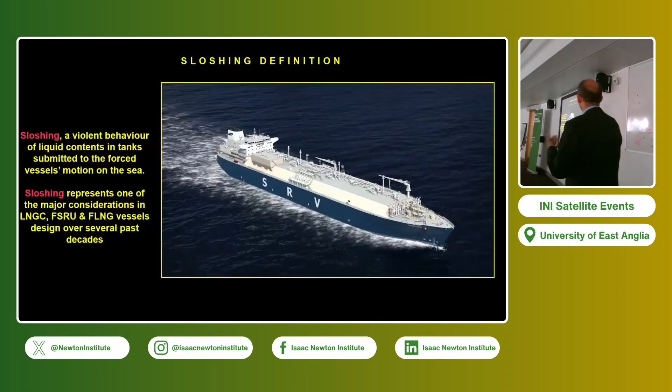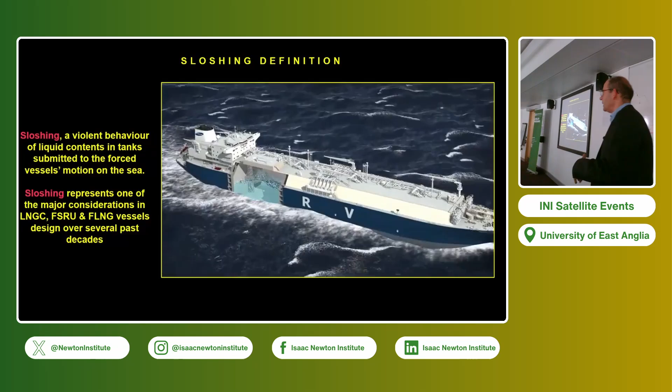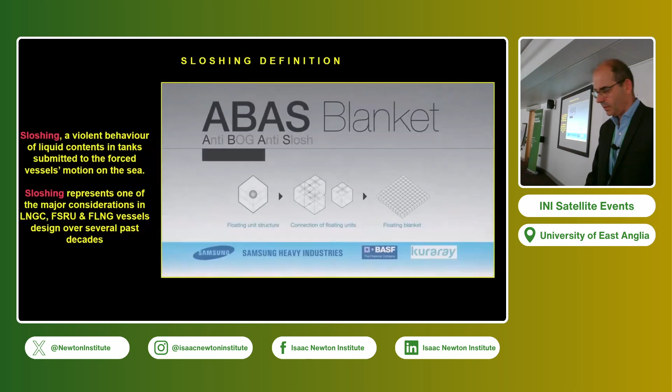the impact of the waves that could damage the containment system, and what you absolutely want to avoid is the leakage of the liquid content, because LNG is kept at a temperature of minus 160 degrees, and if there is a loss of tightness of the containment system, then the LNG, because of its very cold temperature, will make the steel of the ship brittle, and the ship will break and we will lose the ship and the crew. So this is the reason why we have to study it in classical engineering studies.

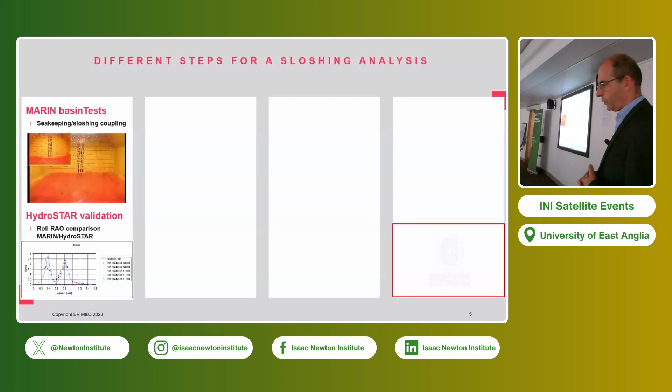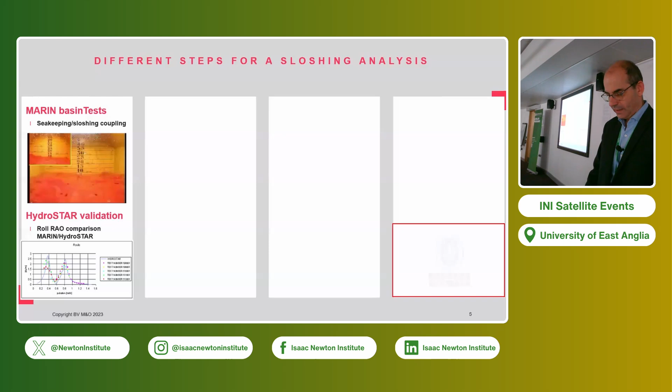First, we start with seakeeping analysis, where we compute the ship motions. For this kind of ship, we have to take into account the coupling between the internal liquid motion inside the tank and the ship motions. This can be done using classical seakeeping software, such as HydroSTAR that is developed in Bureau Veritas. It relies on the potential theory. And using this kind of approach, we can compute the coupled motion.

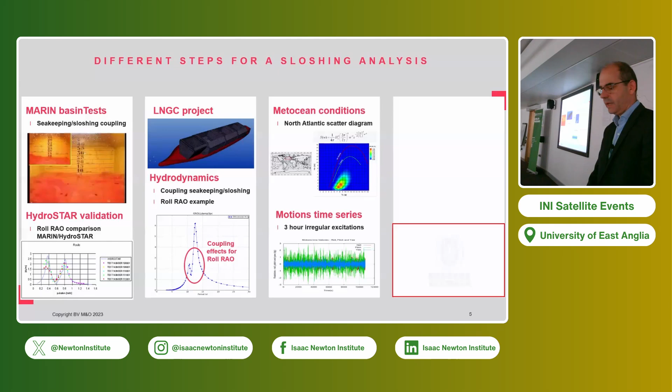So here, during the simulation, we have a screening of the tank's boundaries, and each time the pressure exceeds the given threshold, we store the impact in order to get, at the end of the simulation, an impact cartography. So in this presentation, I will deal mainly with sloshing experiments, but I will say a few words on how we can use these sloshing experiments in order to validate the CFD calculations.

What I can say also is that in daily practice in the industry, sloshing model tests and CFD calculation are complementary, because in sloshing model tests, you can put some pressure probes at some specific locations, but you cannot cover all the tanks with pressure probes, whereas with this kind of post-processing of the CFD calculation, by screening the tank's boundaries, you know all the events that occurred during the ship motions and during the simulation. So at the end, you are sure not to miss any sloshing events. So here is, I would say, the industry practice.

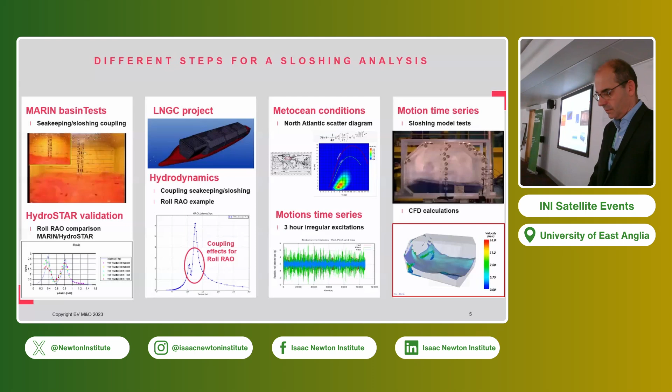And now we'll come to the different experiments that we have carried out in order to validate our CFD tool and in order to better understand the sloshing phenomenon. So first I will start with the global flow. As you see, in Bureau Veritas and in the bibliography that you can find on the subject, there are different kinds of tanks and configurations that were studied. So we start with a 2D harmonic test on a simple 2D tank.

Then there was, I'm sorry, I have to put the cursor here, okay. So there was also some experimental benchmark consisting in carrying out very simple experiments, but that can be shared, and these experiments are published.

So if anyone wants to validate CFD calculation or to perform sloshing model test, they can refer to this publication, where different research institutes, universities, and companies such as Bureau Veritas or GTT participated.

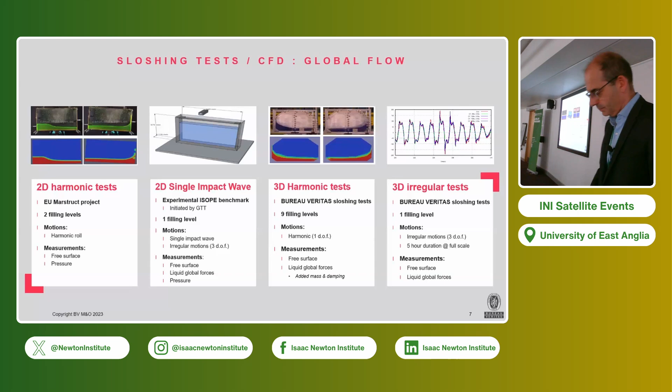Then in Bureau Veritas, in cooperation with École Centrale de Nantes, that is a French university, we carried out some tests with a 3D tank, and we performed a 3D harmonic test, and then we'll come to what we call 3D irregular test. By 3D irregular test, we mean the ship motions. We simulate the ship motions that the ship can see on the sea using Froude scaling. So I will detail a little bit.

So you can see for 3D harmonic test, you can see the setup. So here you have what we call Hexapod. It's a 6-leg platform which can reproduce any arbitrary motion. So for this campaign, we used the Hexapod of École Centrale de Nantes. Here the scale of the model is 1 to 70. We use water and air.

And for the test, we considered different filling levels. In fact, all the filling levels that the ships could encounter. So from low filling levels, what we call the 7.5% of the height, till high filling levels, different amplitudes, different periods of the motions, in order to test and to evaluate the nonlinearity of the phenomenon.

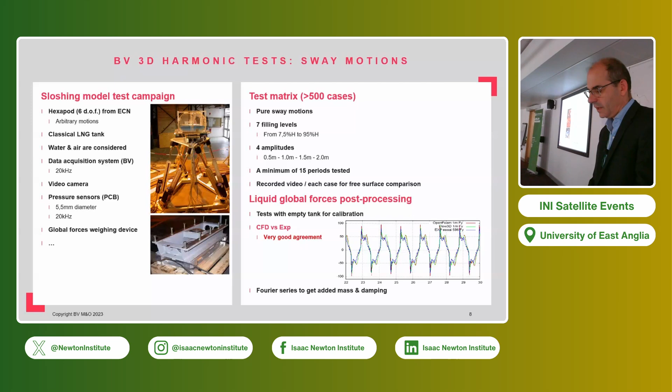And using this measuring device, which is called a global forces weighing device, it allows us to measure the global forces, meaning the integration of the pressure over the tank's boundaries. So it's a global force that we have measured, and here on the graph you can see a comparison between CFD calculation relying on OpenFOAM and the experiments, and you can see that the agreement for at least one motion was very good.

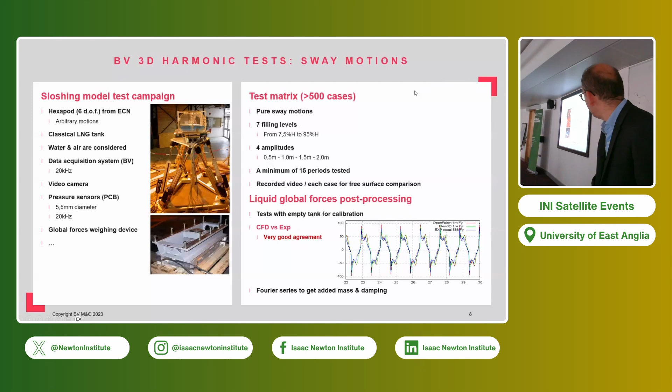So in a publication, we show all the cases that we have tested. So it was more than 500 cases. Each case represents 15 periods of motions. And we validated that the CFD is capable to predict accurately the sway motion, whatever the filling level, whatever the amplitude of the motion, whatever the period of the motion.

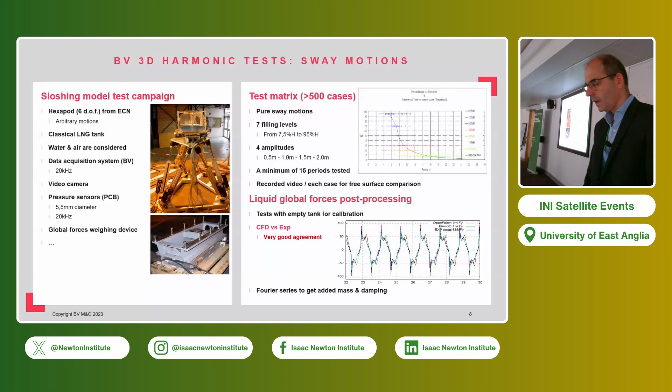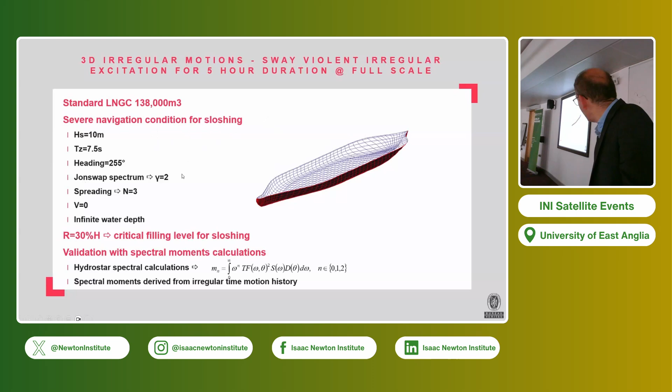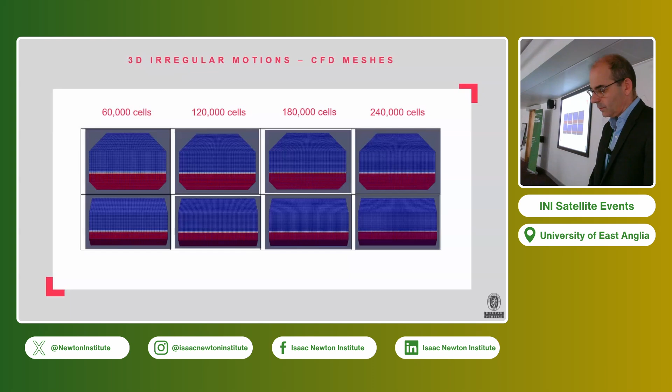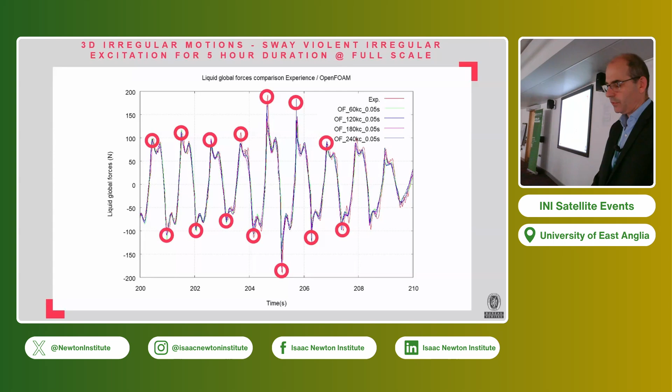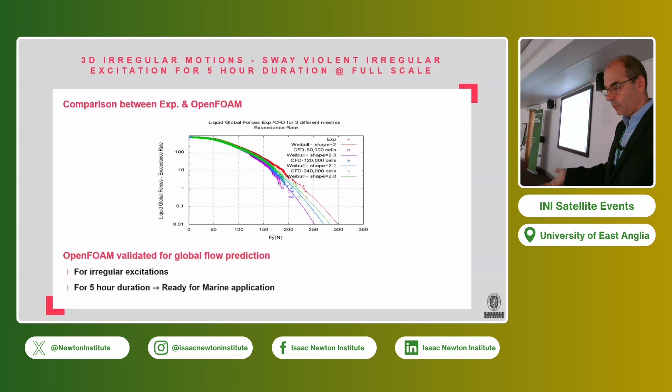And here, in order to represent the distribution of these global forces, we pick up the extrema and we can plot the exceedance probability function of these global forces extrema. And you can see that when you increase the number of cells, you tend towards the experimental distribution of the global forces maxima. So at this stage, we say that using OpenFOAM, we have a good accuracy for the global flow within the tank, and for us, CFD is validated for the global flow.

So now I will come to local flow. So for local flow, I will mention the ISOPE experiment that was initiated some years ago in 2012 by the French company that designed the containment system for LNG carriers, namely GTT. And so we start with a very simple geometry. So it is a geometry that you can find in the paper.

So it's approximately 1 meter in breadth. It's a slice of LNG tank. The scale would be 1 to 40 in comparison with a real LNG tank. We use water and air, and one filling level was tested. Different kinds of motion were tested. Simple impact wave.

By simple impact wave, we mean a very simple displacement that lasts 2 seconds. It's a back-and-forth motion in order to create an impact on the ceiling of the tank. And we put some pressure probes at the ceiling of the tank, and then we can compare the pressures between participants. It was the main objective of this experimental benchmark, but we also carried out harmonic tests and irregular tests.

So different parameters were tightly controlled during this experiment: the tank positioning, the filling level, and also the actual motion of the platform. So this was checked during this experiment. And as measurement devices, we used a high-speed camera with 1,000 frames per second and pressure sensors; there were from 16 to 72 pressure sensors, with a sampling rate of 20 kilohertz.

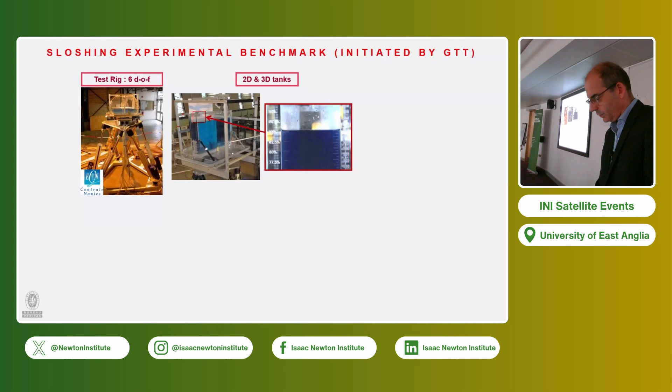So here it is the hexapod that was used during the experiment. You can have a look at the tank that was tested. For the pressure sensors, at BV we had only 16 pressure sensors, so we used our 16 pressure sensors with a sampling rate of 20 kilohertz. That is a minimum in order to capture the dynamics of the impact.

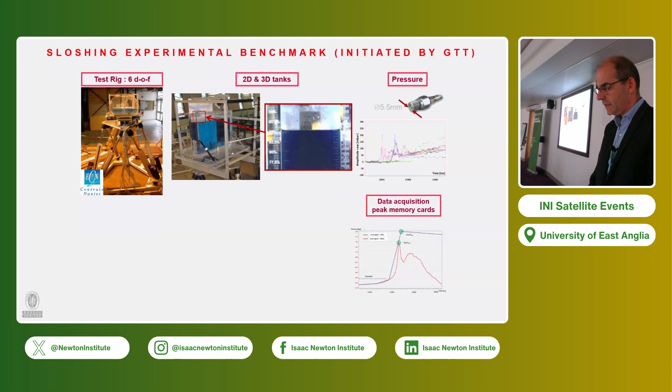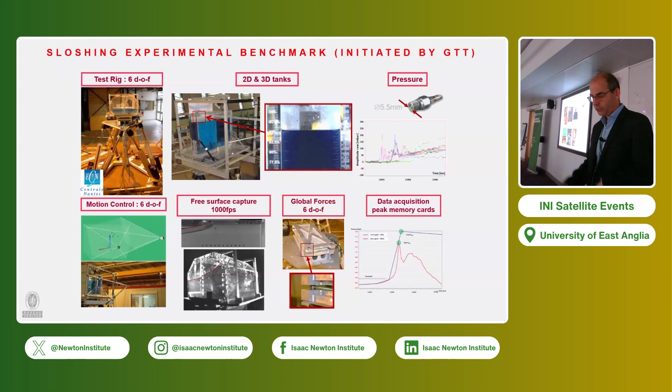We also used a global forces balance in order to measure the global forces. As I said, we have a video camera with 1,000 frames per second, and there was also the use of a motion control in order to check the motion of the tank during the experiments.

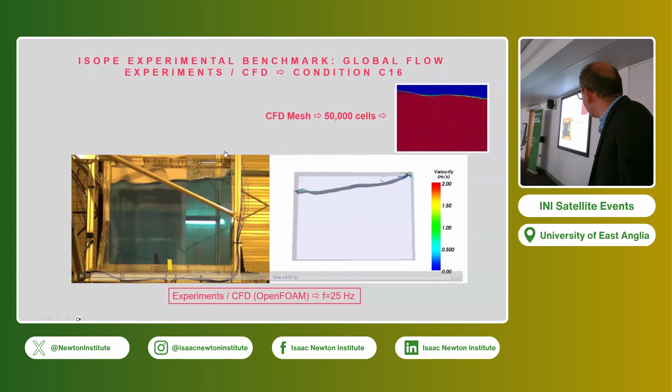So here you have an example of the test that is called a simple impact wave. You can see that the motion is very short. You have the case that was reproduced in CFD. Here it is a classical video camera, so only 25 frames per second.

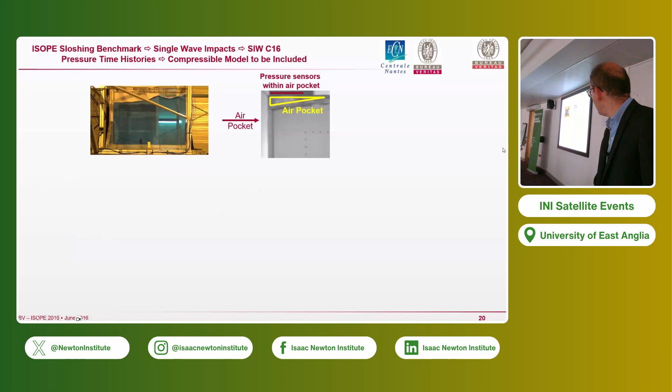And what was very nice in this case is that during the impact, we isolated an air pocket impact. And so the pressure sensors were located in the air pocket, meaning that all the pressure sensors were measuring the same pressure. So this experiment was very nice in order to validate and calibrate the pressure sensors, I would say.

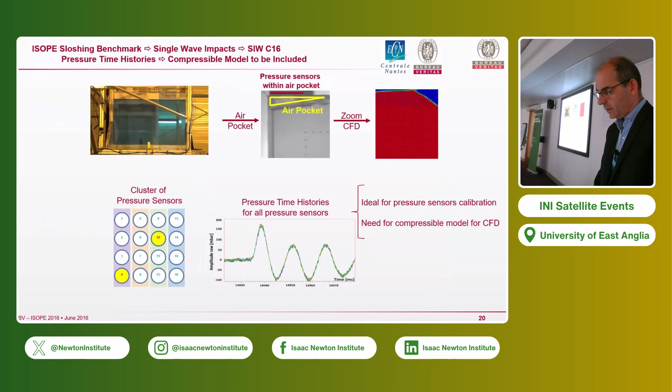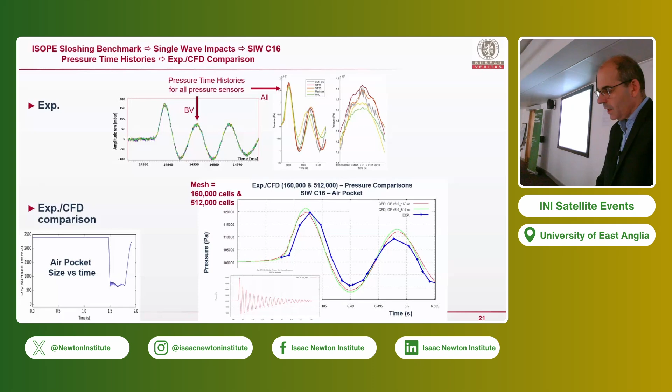So it's a very good model because the time duration of this motion is very short, and so we can compare CFD calculations very easily. We have to introduce a compressible model because the air pocket is compressed during the impact. And if you want to check your compressible model for your CFD calculation, this is a very nice case. So it's what we did, and the agreement was, I would say, reasonable.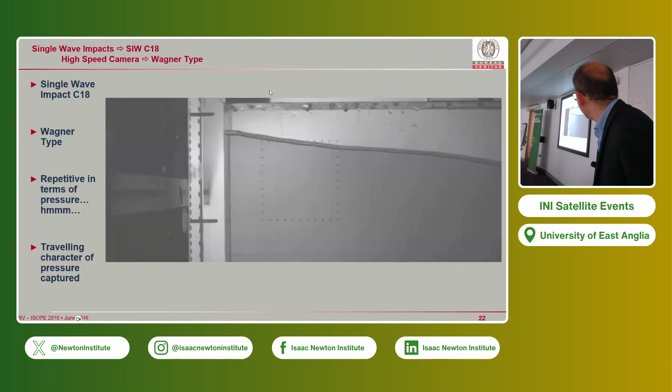So the case that I have just shown you was, I would say, a simple case for which we had a very good agreement. Now we come to a case where we have the high-speed video camera, and here you have a zoom on the impact. Here it is the ceiling of the tank, and you can see that we have an inclined free surface with a kind of Wagner impact, because you have an inclined free surface with respect to the ceiling.

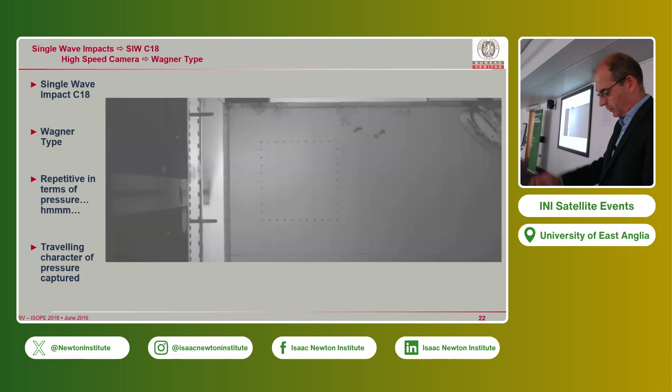So we thought that it would be quite easy to compare with maybe a Wagner model, and also that it was quite an easy test case to compare between the different participants. But if we now compare the pressure measurements, I will not detail the participants too much, but there were French universities, Nantes with Bureau Veritas, the University of Marseille, the French company GTT which designs the cargo containment system, the Norwegian SINTEF, and Korean, Spanish and Chinese universities participated in this experimental benchmark.

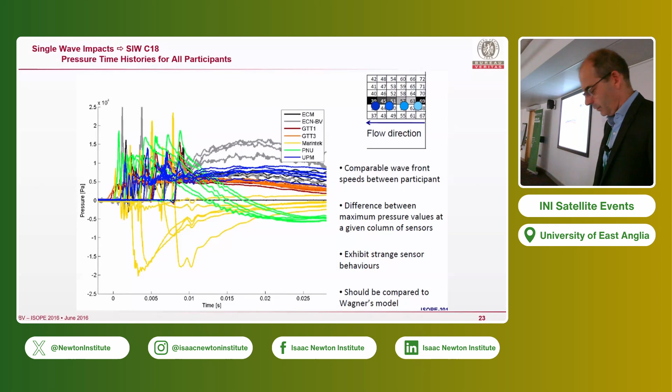And you can see that there are quite large discrepancies among the different participants for a very simple motion, and so for a very simple impact. Now if we zoom a little bit, here we have the ceiling corner. There were of course some repetitions of this test in order to see the repeatability of the test. That is very important. There were 10 repetitions of the test, and we can see that depending on the participants there were large discrepancies for exactly the same motion, a priori.

So these results were quite disappointing. It was during the first year. So during the second year, there was a repetition. And from this test, we can see that the best, at least the tests that are the most repetitive, come from the French company which designed the cargo containment system, namely GTT. This company is quite experienced in sloshing model tests because it is their daily practice. They have 4 hexapods running 24 hours per day.

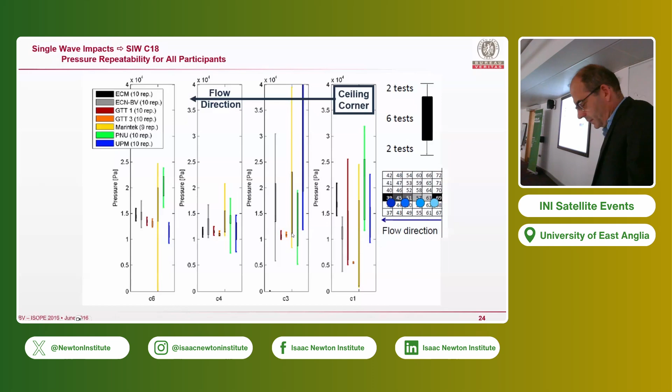So we could give some confidence, but in order to check and to compare, we decided to carry out a CFD calculation using OpenFOAM, and indeed, taking into account the size of the pressure sensor, when we compare the CFD calculation in red with the experiments in blue, we had quite good agreement, except close to the corner. Close to the corner, the agreement was not so good.

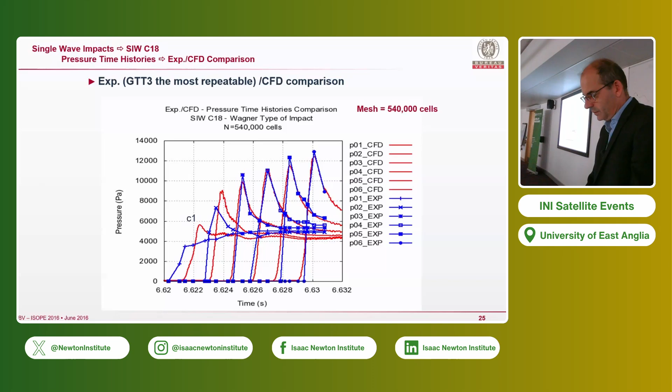It still needs to be explained, but afterwards, we had quite good agreement between our CFD calculation and the model tests carried out by GTT, which were the most repeatable. So it gives us some confidence in this model test and also the CFD calculations.

So at this stage, we can say that the conclusion of this experimental benchmark is that carrying out sloshing model tests is not an easy task. There are many constraints about the data acquisition system because we need to ensure that, for instance, the sampling rate of the pressure sensors is high enough to capture the dynamics of the impact.

Also, there was a strong focus on the signal processing of the pressure sensors. Many mistakes can be made when we post-process these results. Also, the filling level needs to be carefully looked at, and the tank alignment. So all this was checked, but we need to be very careful.

So this ISOPE sloshing benchmark enables comparison between different companies and research institutes, and this sloshing benchmark is a very good basis for CFD validation, because with this simple impact wave, as you saw, we have a very short duration of motion, and we can calibrate CFD using a compressible model or other kinds of impact.

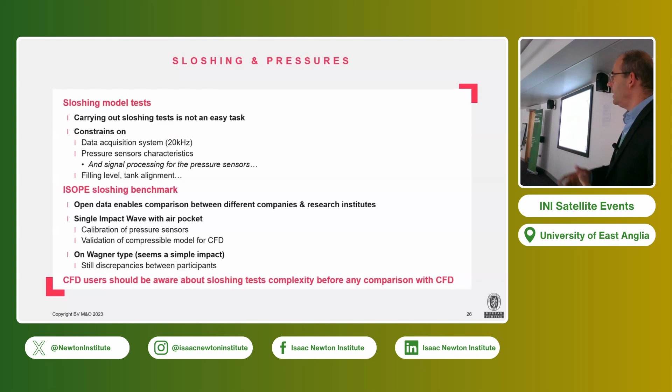And the final conclusion is that CFD users should be aware of the sloshing test complexity before any comparison with CFD. So, of course, there may be some discrepancies between the numerical calculation and the experiments, but the experiments should report the repeatability of the test, and this is not often reported in the literature.

So now we'll increase the complexity of the sloshing model test a little bit, and we'll speak about the phase transition during sloshing impact, and we'll talk about the SLING-IMBOL projects. So during sloshing impact, the main governing parameters, in terms of dimensionless numbers, are the Froude scaling, the density ratio, so the density of the gas divided by the density of the liquid, the gas Mach number, the Weber number, the Reynolds number, and the Jakob number.

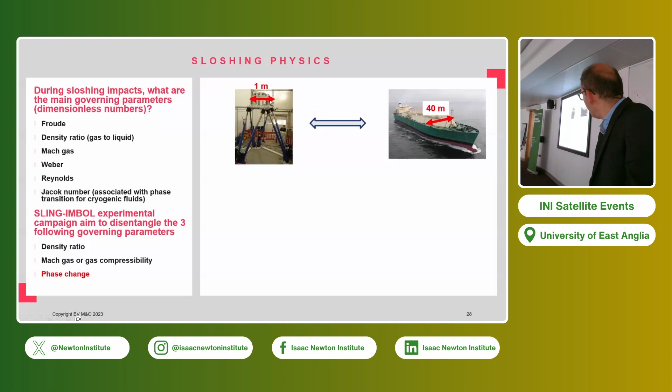During the SLING-IMBOL project that I will talk about, we put the focus on the density ratio between the gas and the liquid, the gas compressibility, and the phase change during the sloshing impact. So all these questions refer to the extrapolation of the model test to full scale. As I said, usually we carry out a sloshing model test for a tank that is 1 meter in breadth. So the scale here in comparison with full scale is 1 to 40. So once we have measured the pressures, how do we extrapolate from model to full scale?

So we need to take into account, and in the next slides we will talk about, the gas compressibility, the density ratio, and the phase transition. So in actual sloshing model tests, the gas compressibility is too high at model scale. The density ratio, so the density of the gas divided by the density of the liquid, in the model test and in reality is the same. And the phase transition is not present at model scale. So we'll see what could be the influence of this phase transition during sloshing impact.

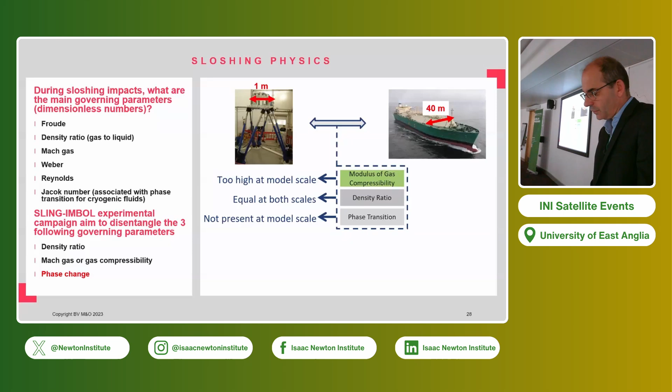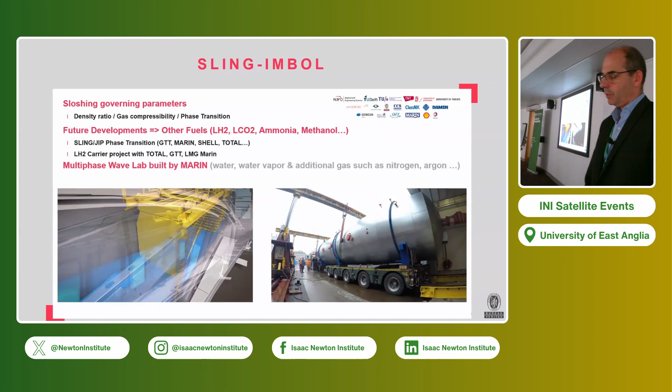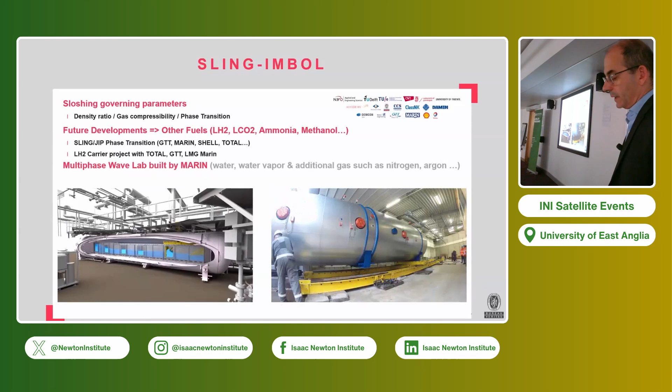So for this, some years ago, in 2015-16, there was a project initiated by MARIN, a Dutch maritime research institute, with companies such as GTT, a French company which designed the containment system for LNG carriers, but also Shell, Total, classification societies such as Bureau Veritas, the Chinese classification society, and so on. And so we wanted to study these governing parameters in more detail: the density ratio, the gas compressibility, and the phase transition.

With the aim also, because now we know that we have a good return of experience on LNG carriers, so on all ships transporting LNG, but now because of decarbonization, we have new fuels that come into the game, such as liquefied hydrogen, liquefied carbon dioxide, ammonia, or methanol.

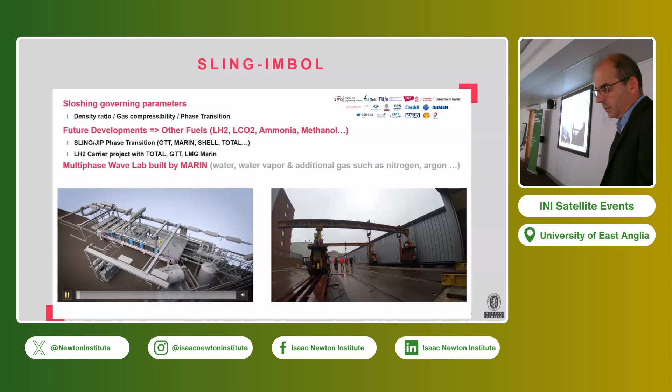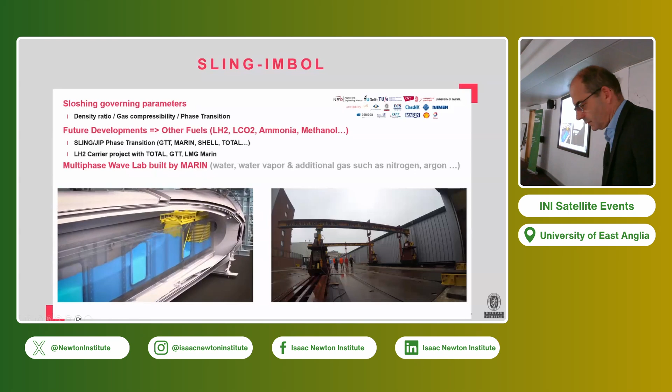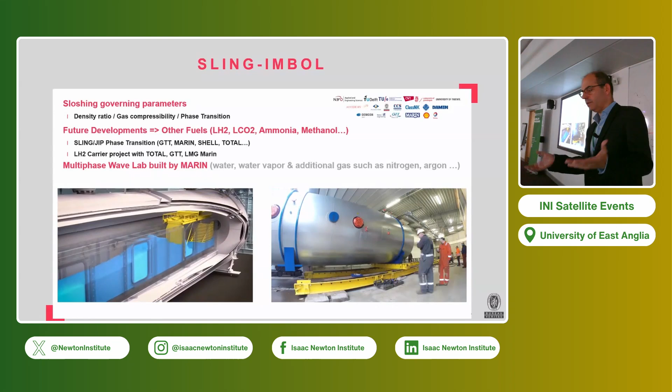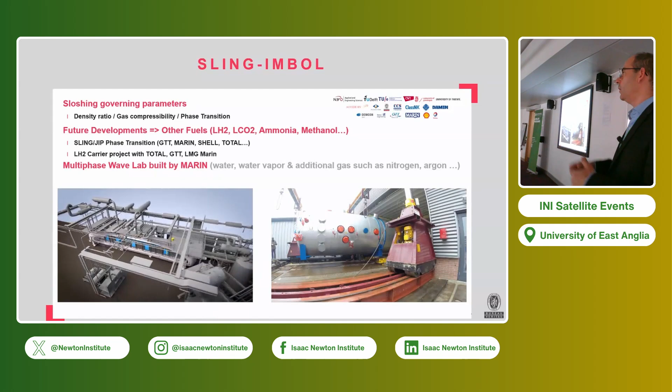And so all these companies are interested in these new fuels, so we want to better understand the physics. So we decided to design this kind of experimental device that is, sorry, I will put again the video. So that is quite impressive. So it consists of an autoclave which is approximately 20 meters long, in which we have put a flume tank. And this autoclave consists of a controlled environment where you can play on the pressure and the temperature in order to be on the phase transition curve for the water, and in order to have condensation or evaporation during sloshing impact, in order to study phase transition during sloshing impact.

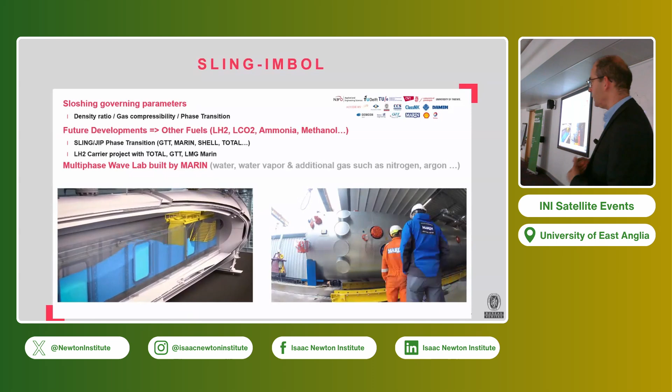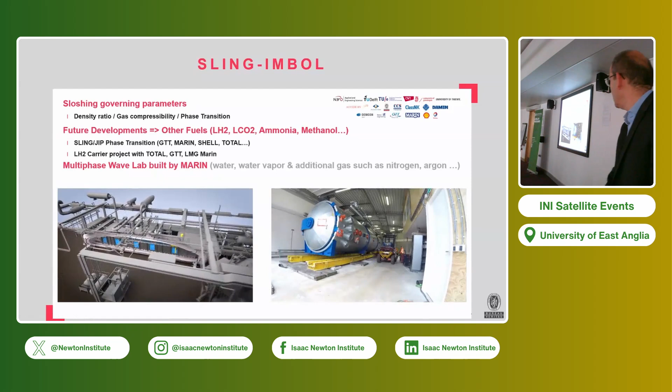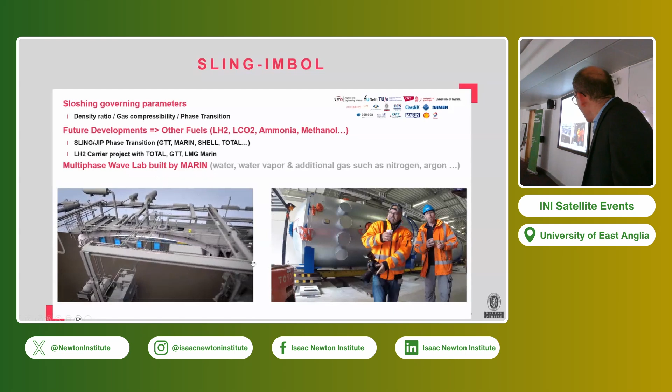So this project was a little bit delayed during COVID, but now we have the results, and some additional results are ongoing. So these projects are called Sling-Imbol. Devaraj van der Meer, professor from University of Twente, is responsible for the Imbol project, and it is a continuation of this Sling project. So you can see that is quite impressive. The diameter of this autoclave is 2.5 meters. Inside this autoclave, as I said, the temperature can vary from 15 to 200 degrees. The ullage pressure inside the autoclave can vary from very low pressure to high pressure, 10 bars, namely. And the gas composition can vary inside this autoclave.

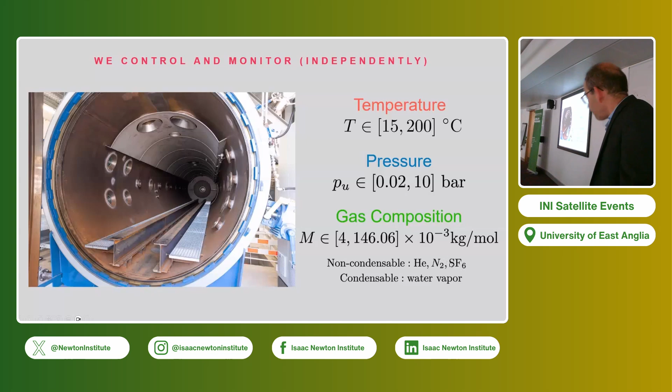One can put nitrogen, argon, SF6, and the liquid of interest is water. So inside this autoclave, we have a flume tank with a wave maker, which is a piston-type wave maker. And you have a beach in order to facilitate the wave breaking. And here you have at the end a wall equipped with pressure sensors, with a high-speed camera, in order to film and to record the impact.

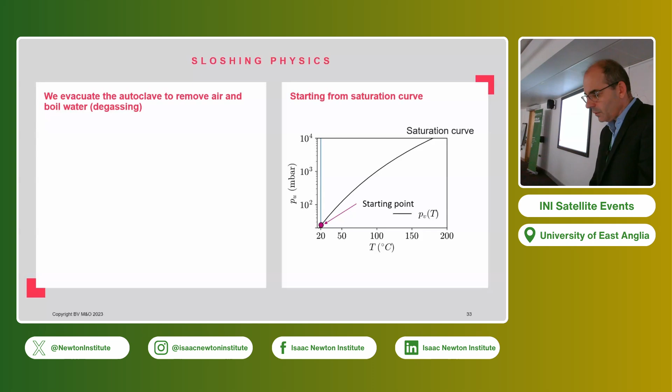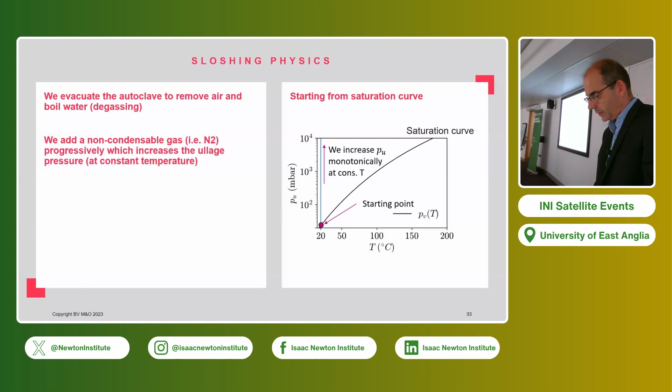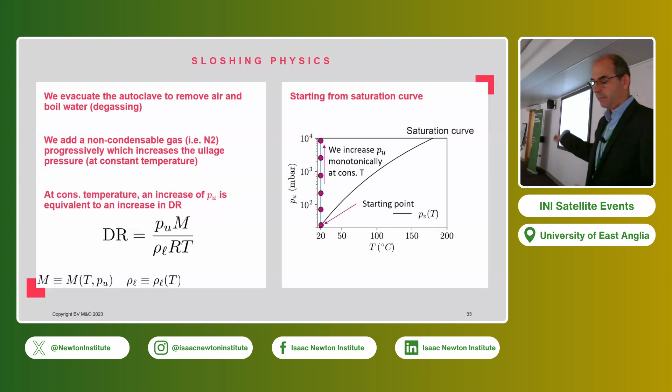So how do we, in practice, during this experiment, because we can play on the pressure and temperature, we can go along this saturation curve. That is quite important in order to study phase transition during the impact, because I have to remind you that LNG and liquefied hydrogen are cryogenic fluids that are in equilibrium with the vapor. And if we also want to study the density ratio, we can increase the ullage pressure, and for this we start from the phase transition curve, and slightly we can put a non-condensable gas on top of the water vapor, and namely for the experiment that I will show you, nitrogen was considered. And by doing so, we can increase the ullage pressure, and the ullage pressure is related with the density ratio between the gas and the liquid, and as you will see, density ratio is a governing parameter for sloshing.

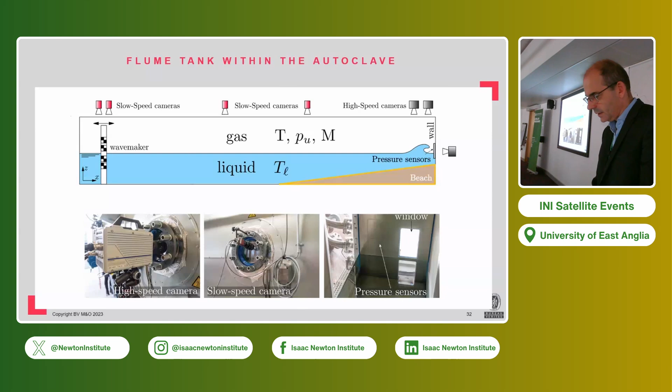So as a motion for the wave maker, we use the motion that comes from seakeeping analysis of a ship. Even if in a real tank you have the two boundaries that move together, and here of course only the wave maker moves, anyhow we try to simulate what could be the motion inside the LNG tank by considering actual motion using Froude scaling. So it's what we did. So we have a long wave maker motion, during 3 hours at full scale. So it was a wave maker signal that was considered.

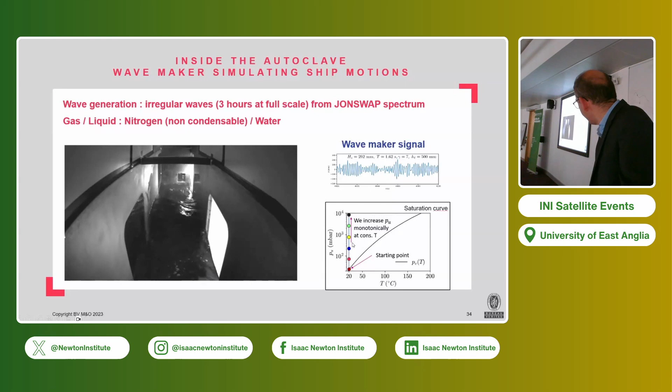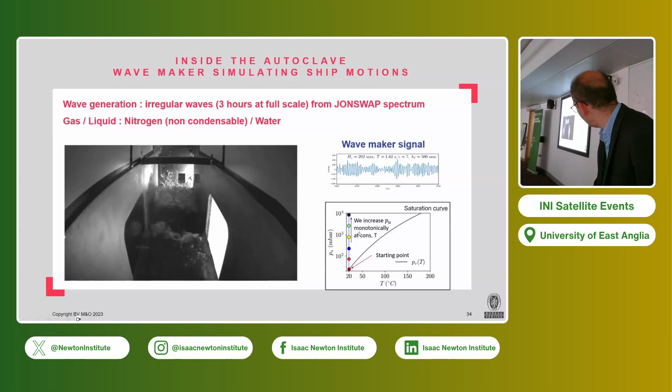And here we consider the ambient temperature; it's ongoing, we'll study all the cases in the rest of this space. But here, in this presentation, I show only results at the ambient temperature. So the parameter that is changing is the density ratio. We start from a very low density ratio and we increase the ullage pressure, and so we increase the density ratio. And we will see the result. So here we measure the pressure.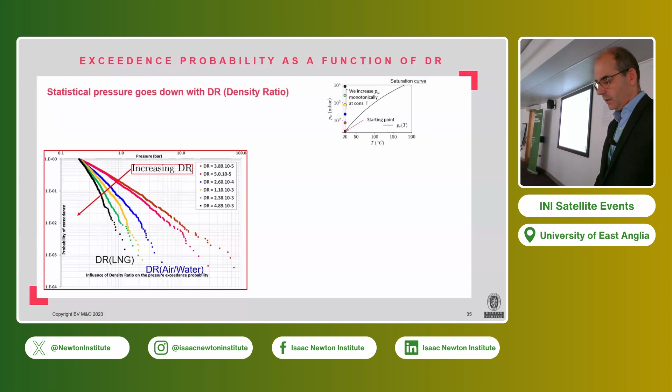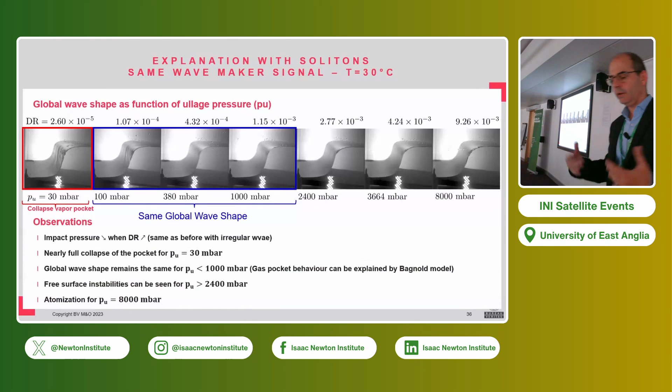So in order to explain this decrease of the pressure with the increase of the density ratio, we came back to very simple impacting wave shapes. This is the reason why we studied solitons here. We can generate solitons with the same wave maker signal, and we can study the global wave shape of these solitons according to the density ratio. Namely, for some density ratios, the global wave shape just before the impact is strictly identical, but we also noticed that the pressure decreased when we increased the density ratio.

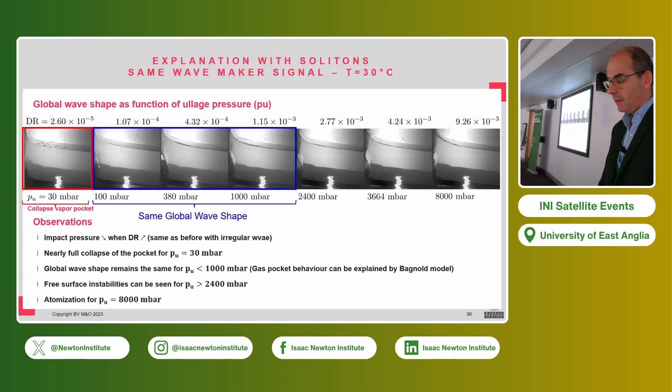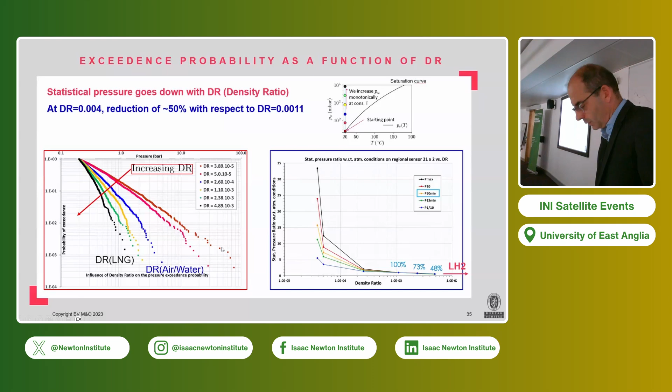But today I will put the focus on this experiment where we are very close to the saturation curve. We saw on the irregular test that this point close to the saturation curve gives very large impact pressures. And we also verified with these very simple soliton cases that the pressure associated with this soliton can be quite large.

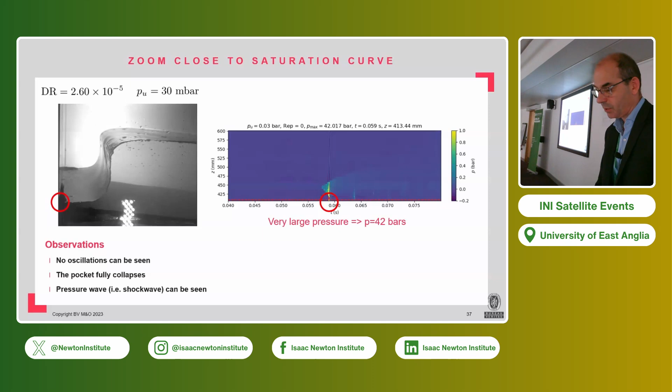What can also be observed is that, contrary to the other cases, we have a kind of gas pocket here, but during the impact, the pocket fully collapses, which is not the case with the other density ratios. We have a pressure rise, the shock wave can be seen, and we have a very large pressure at the bottom of the wall. So now I will come back to the other cases.

Yeah, it's finished. It's finished. Sorry.

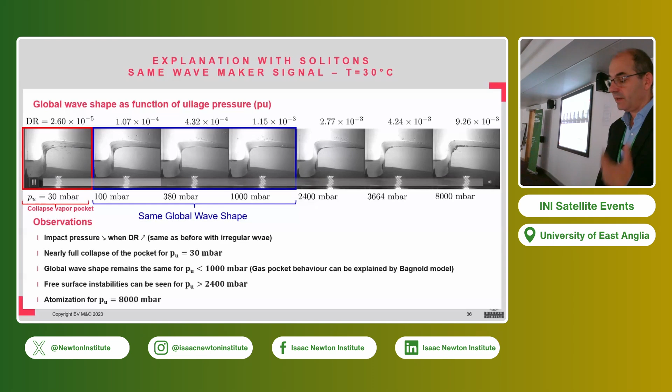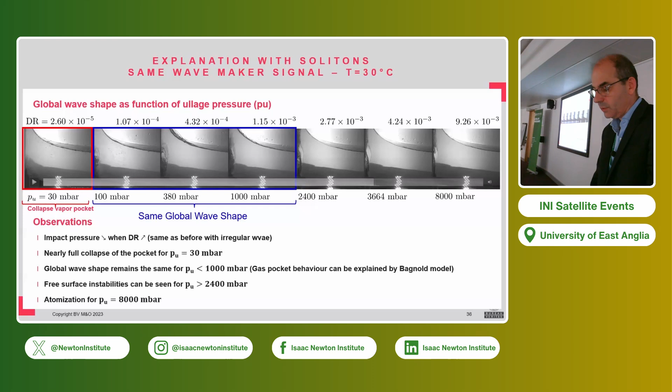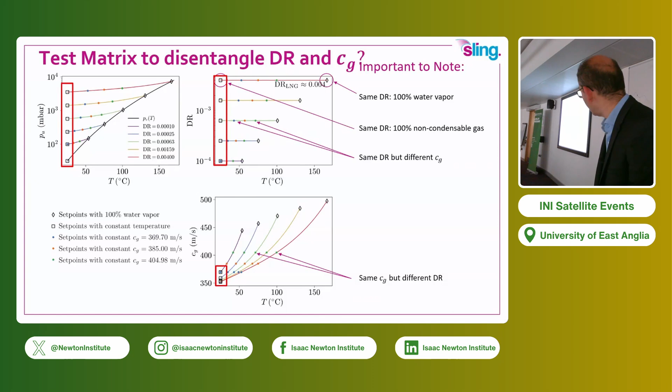And so you can see that for the other cases, where you have larger density ratios and are far away from the saturation curve, you have a gas pocket that is compressed, dilated, compressed, but doesn't collapse, whereas when you are close to the saturation curve, you have full collapse of the vapor pocket, which leads to a very large pressure. We will continue the test by considering the whole test matrix. Today we presented only a few cases, so the rest will be for another presentation.

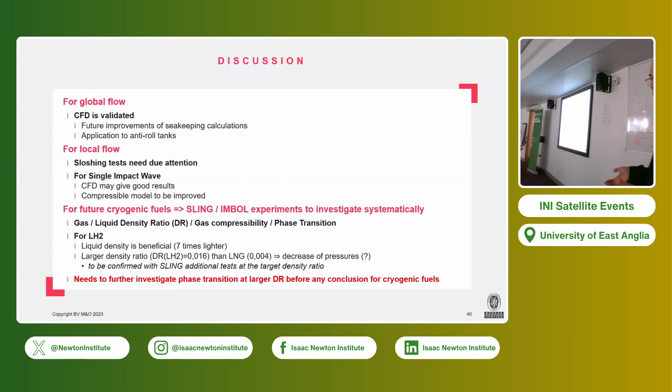And now it is time for discussion. I told you about the different complexities that we can have with sloshing model tests. It starts from global flow, which is well suited to validate CFD calculations, to local flow, where, in terms of sloshing pressure, we may have some difficulties having repeatable tests.

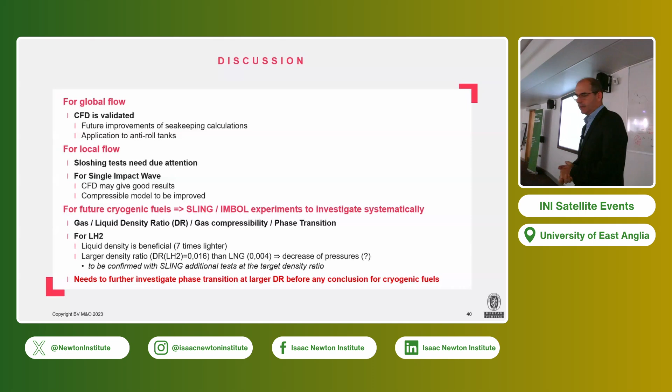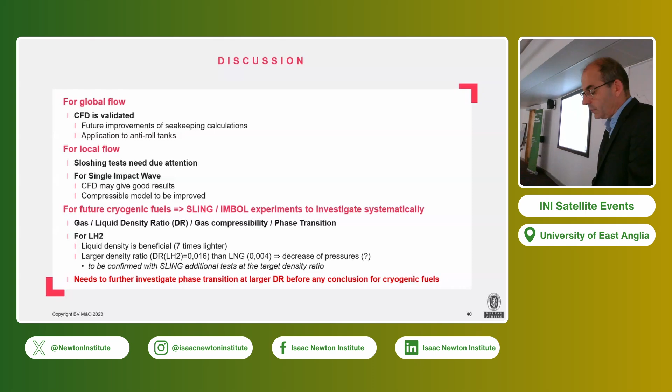And we end with this SLING / IMBOL, where the final objective is to study the influence of phase transition during sloshing impact. For the industry, we can see that for liquefied hydrogen, as the density ratio is quite high, it's a good sign that the sloshing pressures will be mitigated, but we still need to further investigate the phase transition with a larger density ratio before any conclusion. And that was the conclusion.